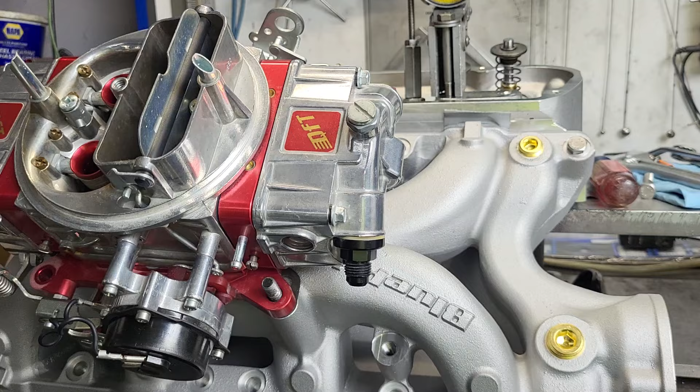Okay, guys, we got a treat for you today. We're going to flow the GT40X. Pretty much done. I think that's the way they're going to be. This is actually the other head. It is cylinder number 4. And we're going to test 2 intakes on it. This is the blueprint Edelbrock RPM Air Gap copy. On top, we've got a 650 QFT annular discharge carb. Really nice looking piece. And let's get to it.

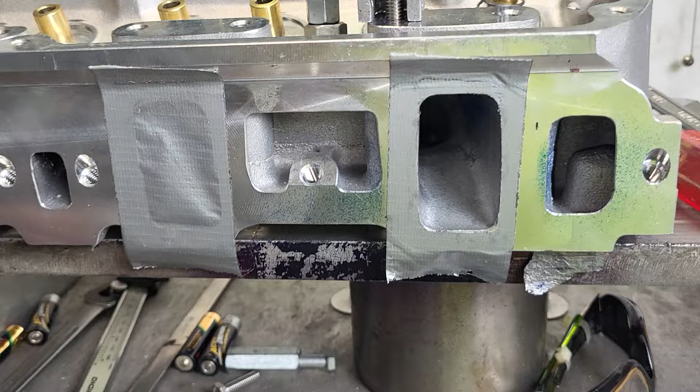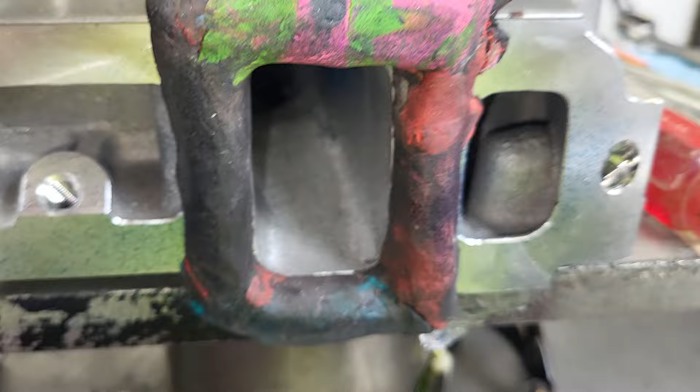Okay, an important point to make whenever I test manifolds: everything else is taped off except the port we're going to use. And all the other ports on the other side of the intake manifold have to be sealed as well, so you're only drawing through one port. Now, I'm just putting this back together because I want to give it a shot of Dykem in its finalized state. But we had a question on what the flow ball is doing, okay?

What the flow ball is doing is, if we're flowing and it's already past separation point on your short side, and you put a flow ball on the floor, such as something like this, that causes turbulence, and sometimes it can reattach to the short side, and you can see what your flow could be if you could stick to the short side. So I'm going to do a 2-second demo on this before we look at those intakes flowing through this port.

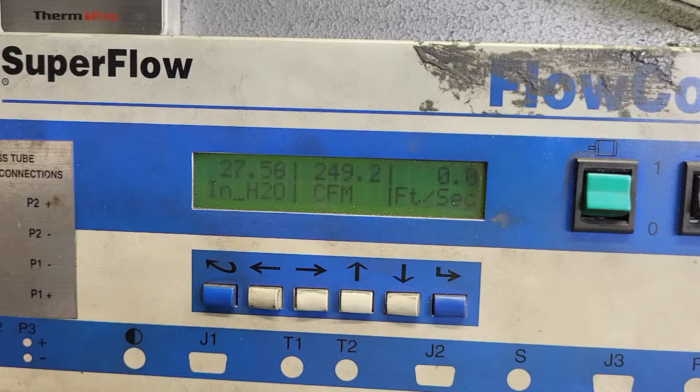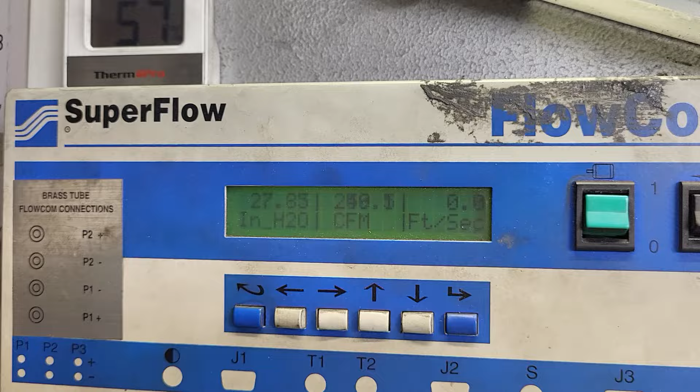Okay, you can see we can get quite a big jump if we can get the air to stick to that short side a little bit more. Now, there's a couple things about the short side I'm not thrilled with. One, it's very low. Two, the speeds are not bad where they are. Could I make them better? If I'd like to push the casting, I probably could. This is a street ride. I don't want to make anything thin. Could I probably do better than it is right now?

Well, right now we're at 0.6-inch lift, which is probably more than this engine's going to run on a street engine. And if I do any more work to the short side, i.e. lay it back, make it wider, things like that, or change the angle of the roof, the floor, I'll probably lose mid-range at this point. So we'll take a quick look at that.

If I remember, I have the flow numbers of the GT40X that DV tested on the 306 when I did my E7s, and we can compare them. I know he knocked the short side way back. I even have a picture of the chamber after it burned. Kind of interesting. If I forget about it, I'll have to make another video because it's good stuff.

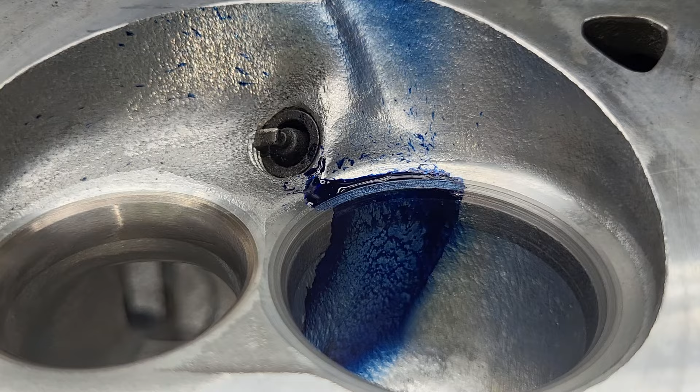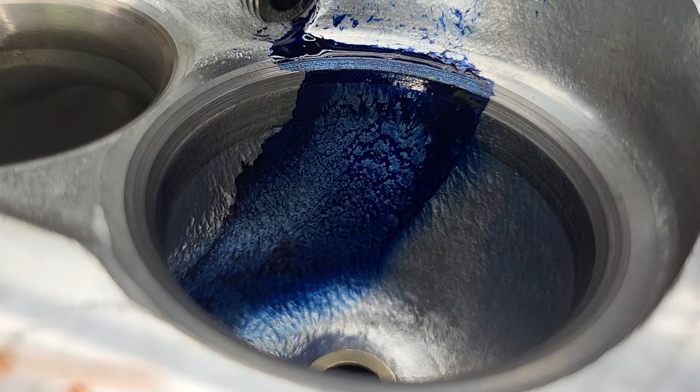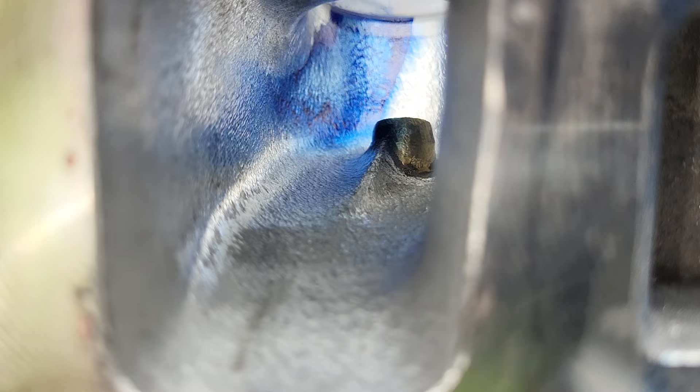Okay, now this has pretty much been finalized, meaning I went through all of them and I made all the bowls and so forth as close to the same size as I possibly can. You can see by the blue, we've got nice blue action on the chamber. We got a couple speckles on the other side of the plug. We look real good in the bowl. You got a nice powder on the valve. See just a hair on the other side of the valve. You can see how far back in the port the blue starts hitting that wall because the port is turned to the right. Okay, small block Ford, that's the way it does it.

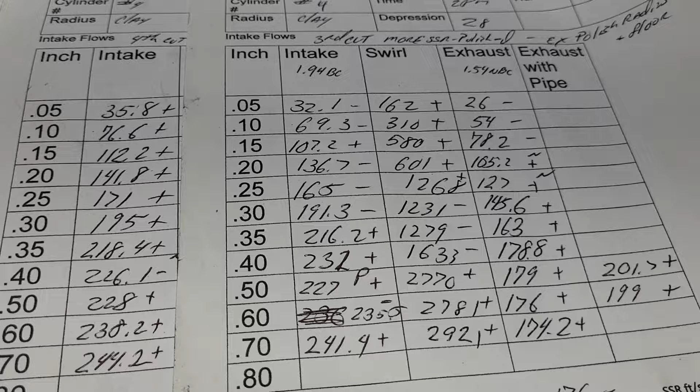Okay, we'll take a look at the third cut on the same port, number 4, versus the fourth cut. The other flows, I put it as 1. I do mix up my Ford and my Chevy firing orders sometimes. This was my original port that I did my development on. So I'm going to finish it up on that port and do all the testing on the intake on that port. So that's going to be our fourth cut.

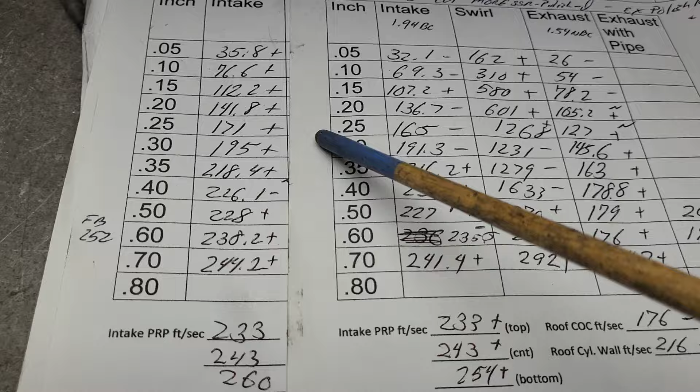How did we do? Well, by the time I equalized all the bowls and everything, we got pluses everywhere, but she starts the transition a little bit earlier. Now, that didn't bother me too much because I know we're going to choke it down with a dual plane and a smaller carb. Now, if you think that's a mistake, you correct me in the comments, and maybe we can learn something from it.

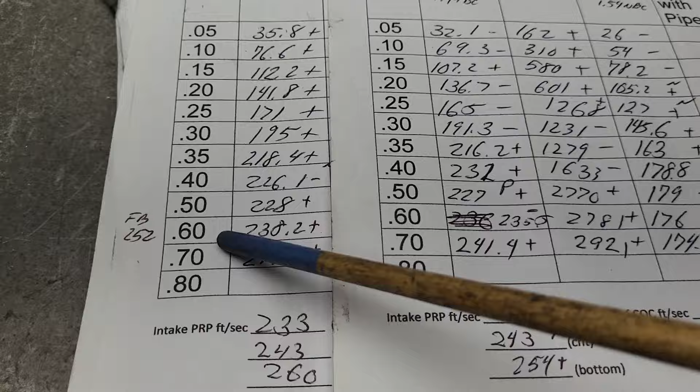Let me see if I can find the flows to DV's. I'll put them in here. Now, as it is right now, at 0.6, which is higher than this will go, we go 238, which is a little bit better than it did last time, right? Notice here at 5, we had a pulsation. Pulsation's bad. Okay, we didn't have that here.

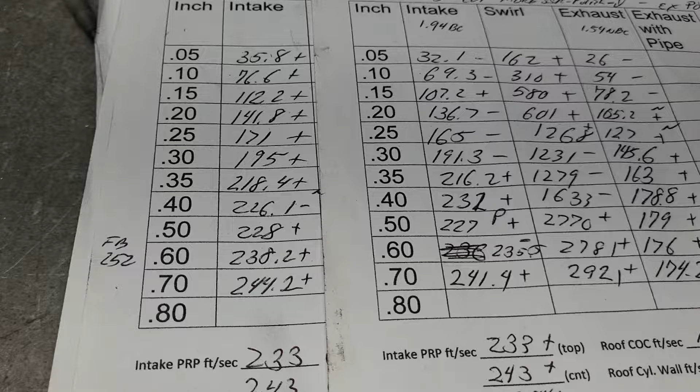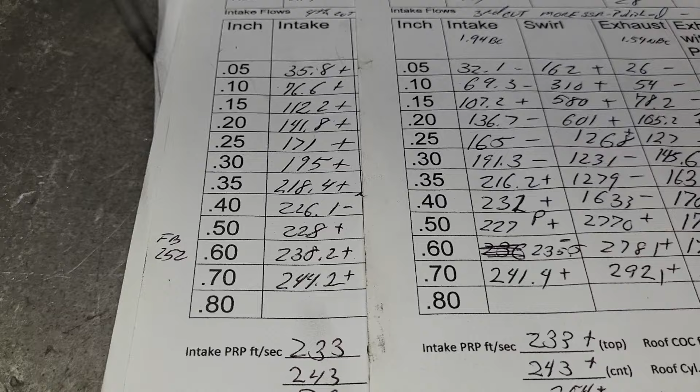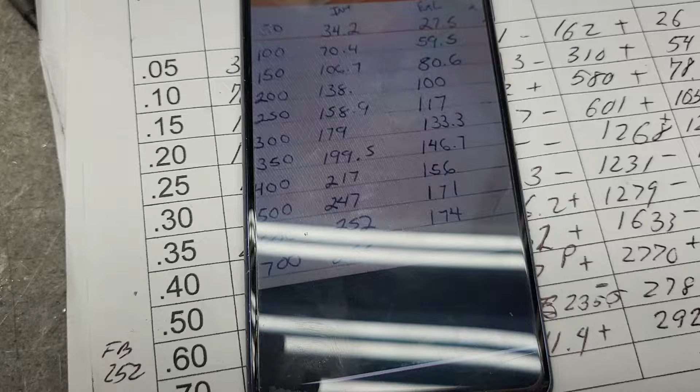And we put a flow ball on here, and we got 252 approximately. I think it did better than that on the bench when we did the demo. I think it went 255. In any case, not bad. Let me see if I can find those flow numbers from DV. Okay, that may be hard to see with the reflection of the lights, but that's a picture that DV posted. Actually, I think maybe Andy posted it on Speed Talk. They did a thread on these heads, and that was their last flows.

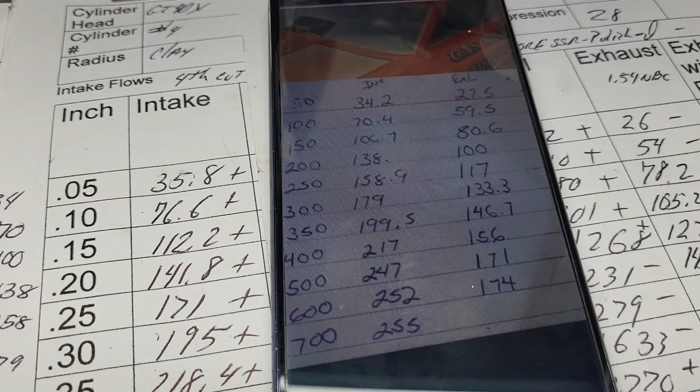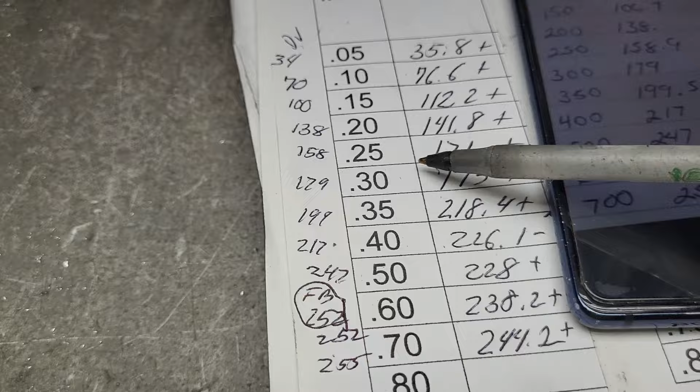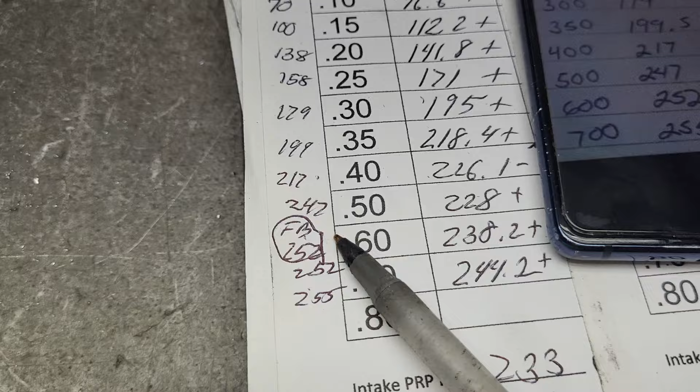I'm going to take those numbers and convert them. Okay, hopefully you guys can see it. This is how they convert. All right, these are DV's. Let me just write DV here. Okay. I got him beat all the way to here. See, I know he knocked that short side way back at this point, and he's got smoother flows. Where I break into transition, he's got smoother flows. But what happens is he dropped a lot here. I mean, we've got big differences between these three. I'm not sure which one would make better power, especially on a street application.

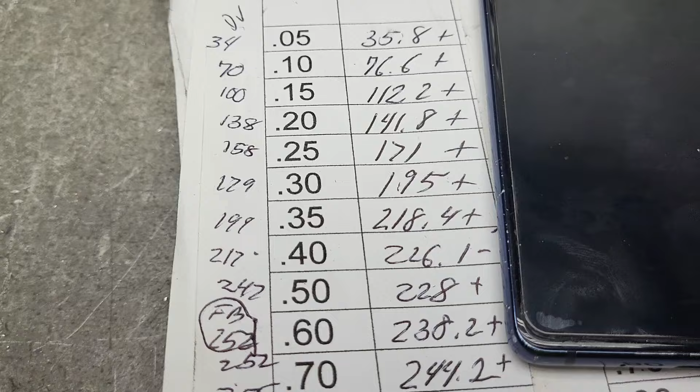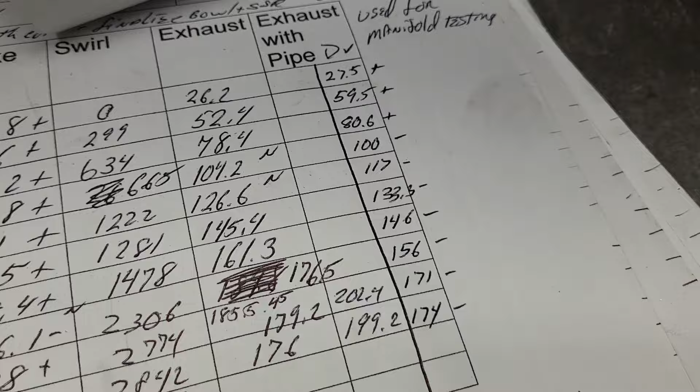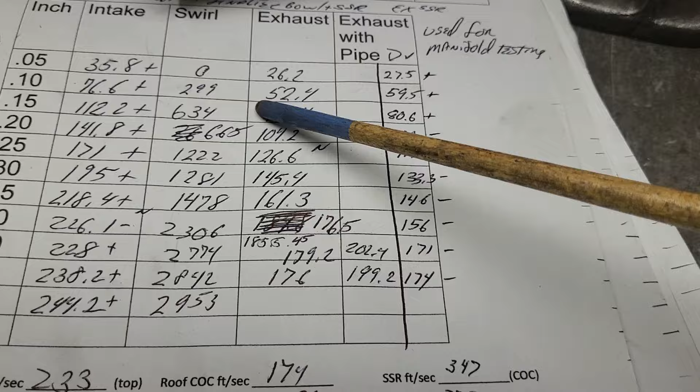Let's do the same with the exhaust port, see how we did. Okay, let's take a quick look at that. I converted it to the DV column there. Let's see how we did against that. Okay, it really doesn't surprise me because I'm using a stock valve job. DV, I know, does a custom valve job, so he likes his low lift flow. Yep, he beat me on all the low lift flows. And after that, I start winning.

Now, I have a little noise here. I don't know whether he has noise or not, but I've got some good gains on him in the mid to upper ranges, okay? And we top out pretty good, 180. I'm trying not to make that exhaust port too big. So that's what we've got.

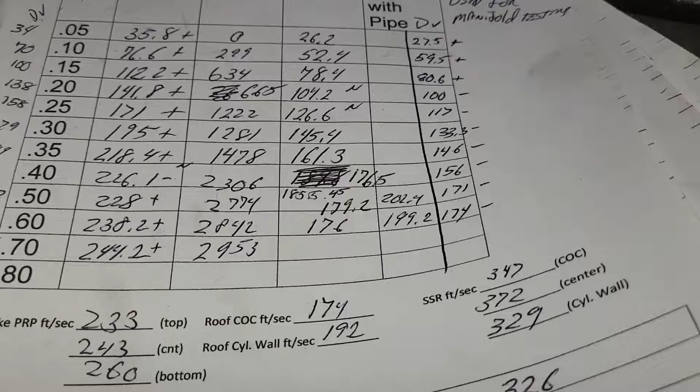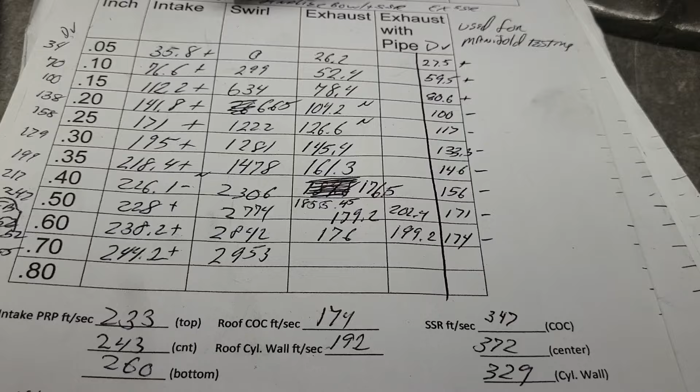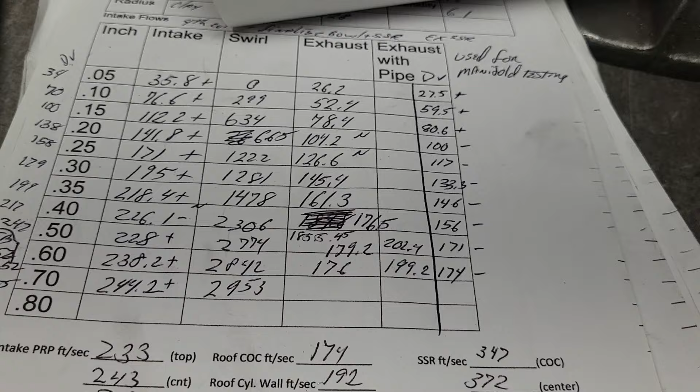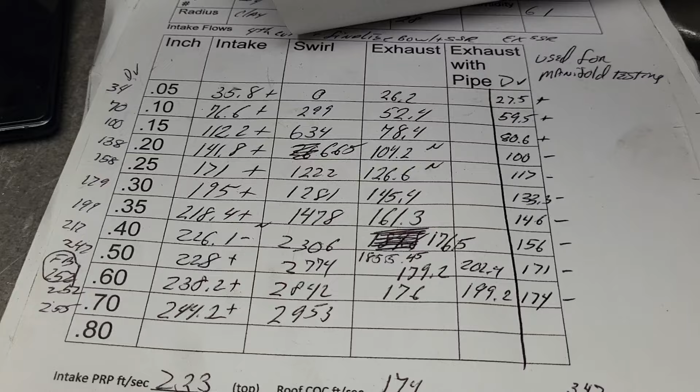In any case, with these flows DV made, now I know my E7s went 361 horsepower. That's on a 306 with a hydraulic flat tappet cam. It's only 206 duration at 50, 0.478 lift. And these heads were down a few horsepower, but they actually made more low-end torque. I don't know if I have those sheets on my other phone that I can show you guys. Okay, I can see this video is going to be running along already.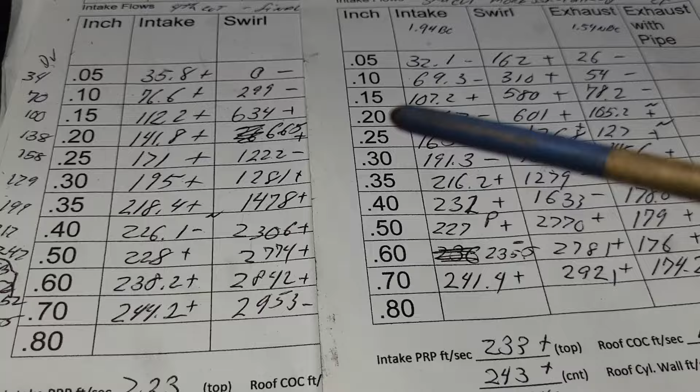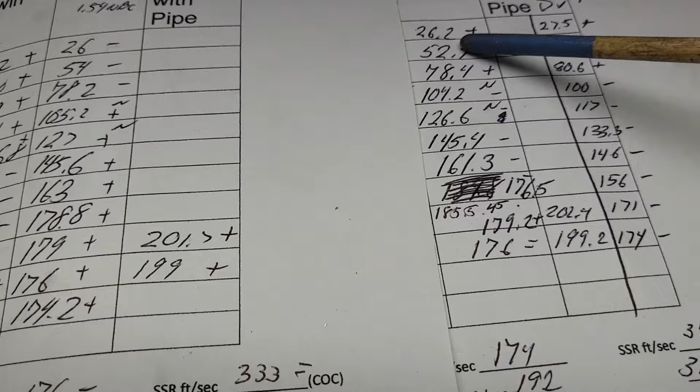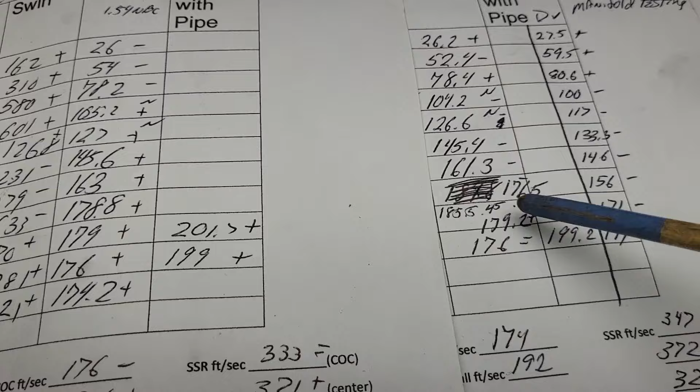Take a quick look at the finalized swirl versus third cut swirl. We got minus, minus, plus, plus, minus, plus, plus, plus, minus. It's fine. Either way is fine. Okay, as far as the exhaust, the only difference was I did polish the short side in a little more detail. And these are all hit and miss, a few CFM. This one topped out at 185 at 0.45. Okay, and we did a tiny bit better on our exhaust with the pipe. Still 180, 202. Not bad for a relatively small exhaust port.

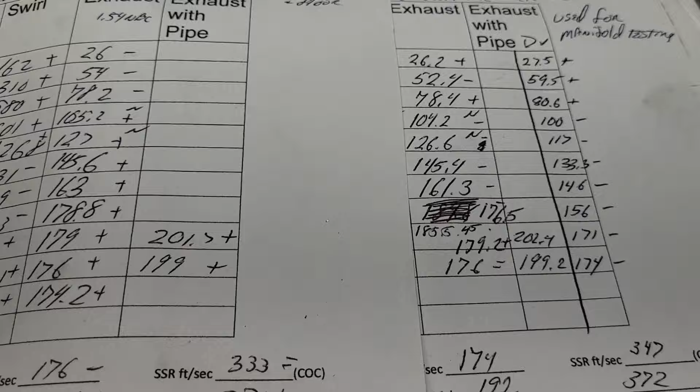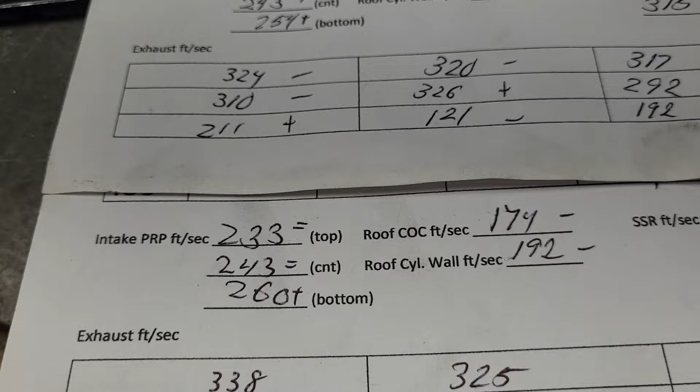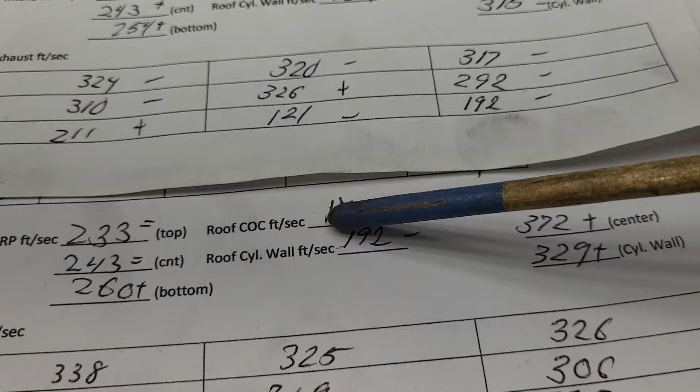Okay, take a look at third cut intake airspeeds versus fourth cut intake airspeeds. Now remember, all I did is equalize the bowls, make sure the roofs were the same size, things like that. Equals, tiny bit plus, minus, minus, very close though from what they were. I did raise one roof more to even this number up. Okay, see if you can figure out what I did there. And as far as our short side, we got plus, plus, plus, right? The short side is more efficient at this point, but it's starting to get a little on the fast side. Now, that's all tested at 0.6 inch. It's already in transition.

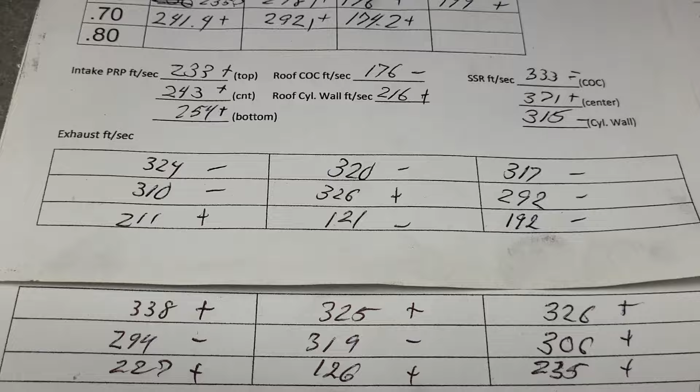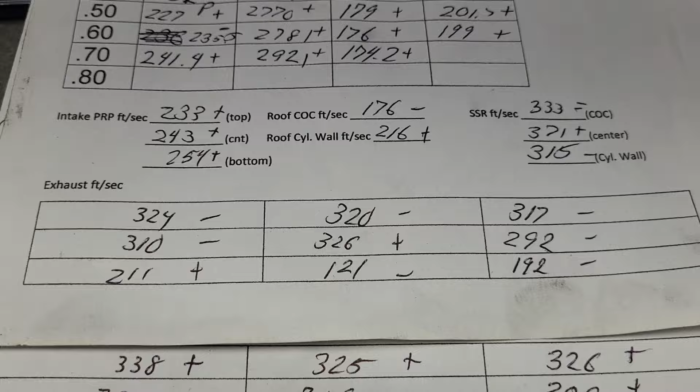Okay, and at the exhaust, that's our third cut exhaust air speeds, fourth cut exhaust air speeds: plus, plus, plus, minus, minus, plus, plus, plus, plus. They look better, but yet they flow almost identical. This has got a little more attention to the short side radius polish.

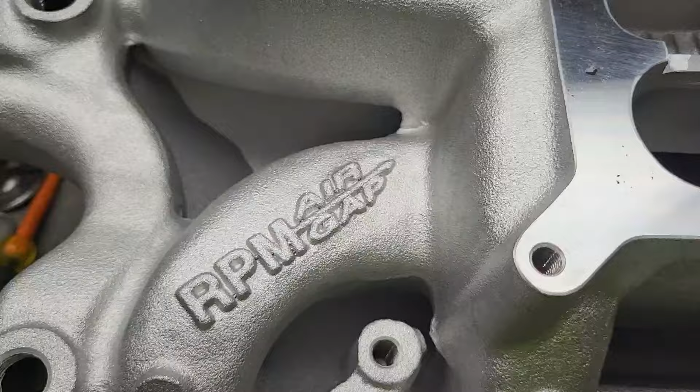Okay, brand new out of the box, Edelbrock RPM Air-Gap. That little tag means a lot to me. Now, what we're going to do is take a look at this, and we're going to look at the blueprint copy and see if, I hate to say it this way, that little tag is worth the higher price of the Edelbrock. I always liked Edelbrock stuff. I can't say I didn't. And the casting is in nice shape.

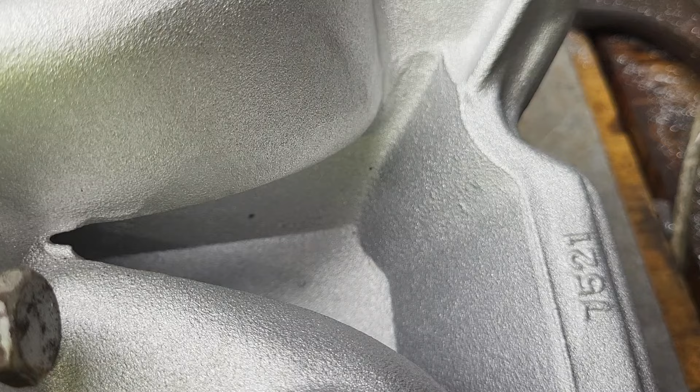It's a 7521. Okay, it's a high rise. It's got nice shaped runners. Okay, the plenum is nice. It's notched, but it's not notched very much. It's only about 1/4 of an inch notched. It's got the nice ribs in the plenum. Okay, the plenum does kick out. It should kick out.

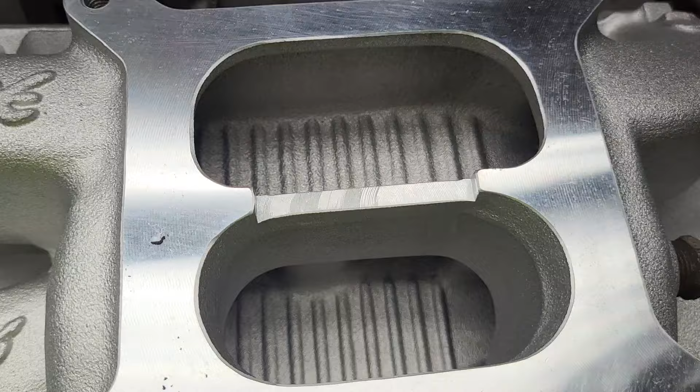And I will say that your transition on the bottom plenum to go into the runner is a little small. I probably would have made them a little bigger. But as I always say, they probably did that on purpose because the bottom plenum usually flows better than the top plenum.

So when we did testing on this, we used cylinder head number 4. So our first test is going to be out of this runner, which is an upper H, which we would expect to be a little bit lower when I flip the intake manifold and flow it through this one at the lower. Okay, so that is number 5. So we're going to compare 4 to 5. Overall, nice looking piece. Let's take a look at the bottom. Okay, I got a one-handed.

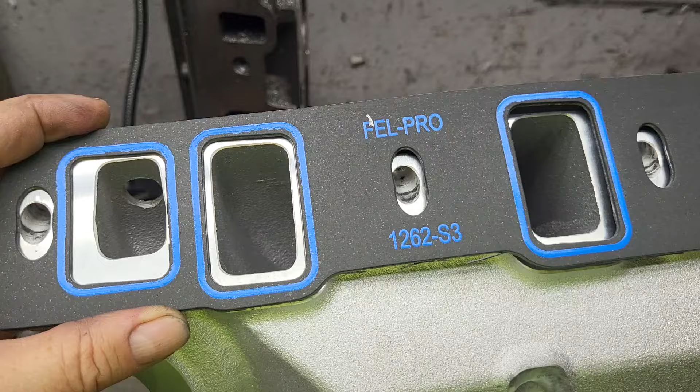Now this gasket, 1262S3, fits the cylinder heads almost perfect. I didn't change the opening on the cylinder heads. So the cylinder heads are about that big, and the intake manifold's quite a bit smaller. Now, is that a detriment? Depends who you talk to, right? That gives you a nice anti-reversion edge. May not be a bad thing on a street engine.

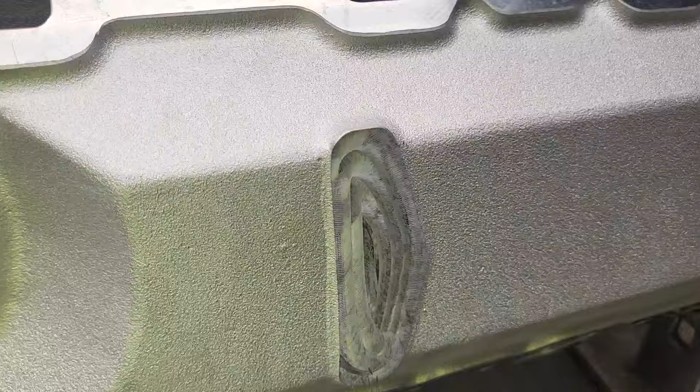Now, can we take this and open it up and get some more flow? Well, you might, and you might not do anything. The customer has to decide if it's worth spending the money, or are we already there for what he wants to accomplish. Okay, we measured the openings. They are almost identical to the thousandth between the Blueprint and the Edelbrock. The Edelbrock's got a little bit different finish on the bottom, but it looks like it's all machined very nicely.

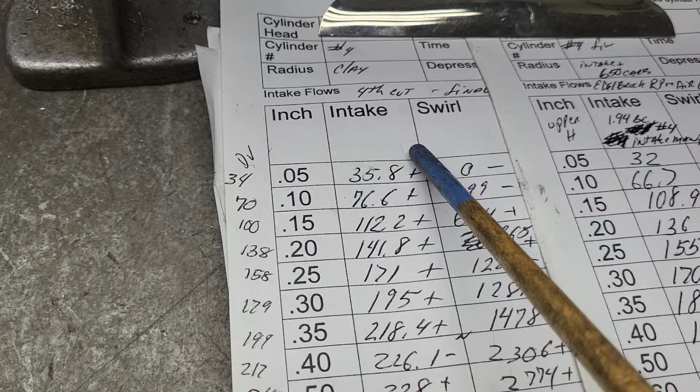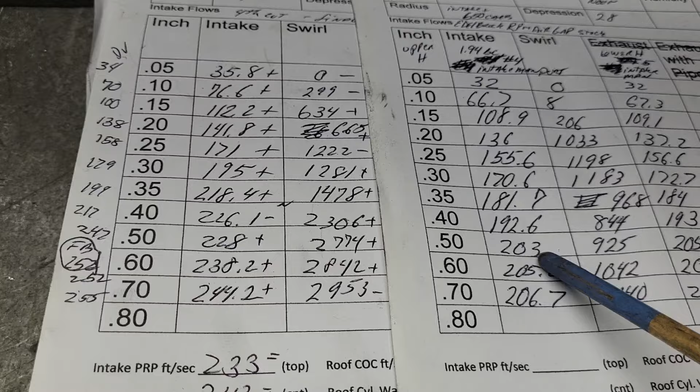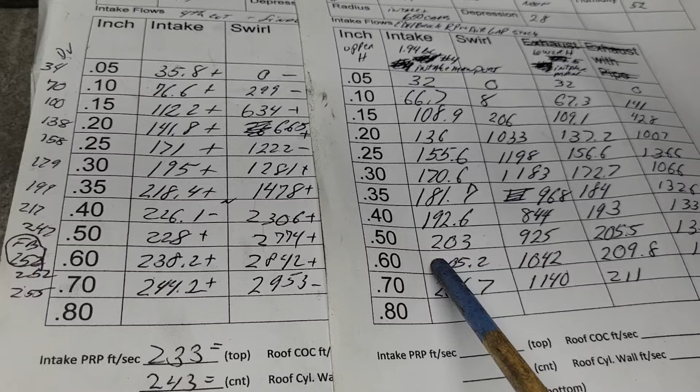Okay, I got some scribbles on here so you can see. Number 4, which is this runner, upper H, right? I wrote up here, upper H. And it's going against our 4th cut number. So this is what you're going to get. Obviously, you're going to lose because it's on an intake manifold. Like I said, most dual planes only flow about 220. Now, you're putting it also through a carb and a cylinder head. So if we're running right in this area, we have over 200 CFM flow. Should be more than 400 horsepower right there, okay? That is with a completely untouched Edelbrock and a 650 annular discharge carb.

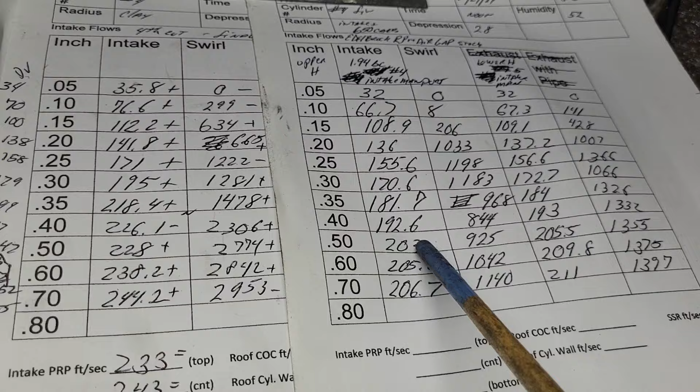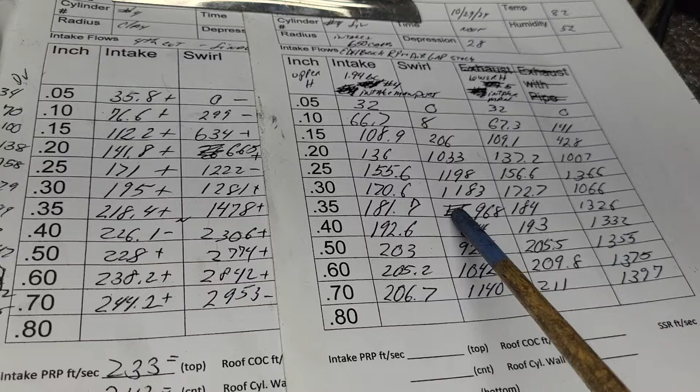Okay, this is what happens to our swirl. This is where we were. This is what it is. Notice how much it changes. It's actually a bit low. Now, this head is designed for adding swirl. I wasn't able to test this head completely stock with the intake manifold. Intake manifolds just came in. But it's kind of interesting, right? We don't have to worry about too much swirl at this point. We're actually a hair lower than I'd like, but I think it'll work fine.

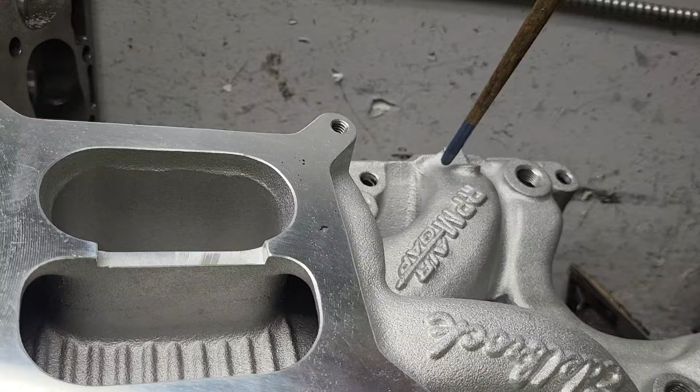Now, let's take the intake and just turn it around. Okay, so now we're going to be in the deeper plenum. This plenum does have some anomalies in it. It has got a big ridge here. It's got a ridge all around it. The Blueprint does not have that. Okay, so we're coming down and we're flowing through this runner. Now, remember what I said about the deeper plenum, right? I usually found that it flows a little bit better.

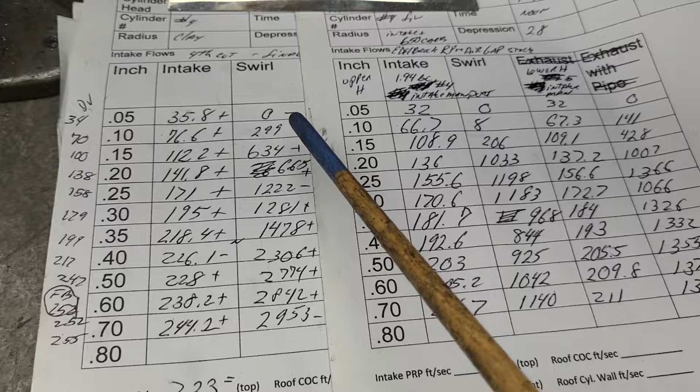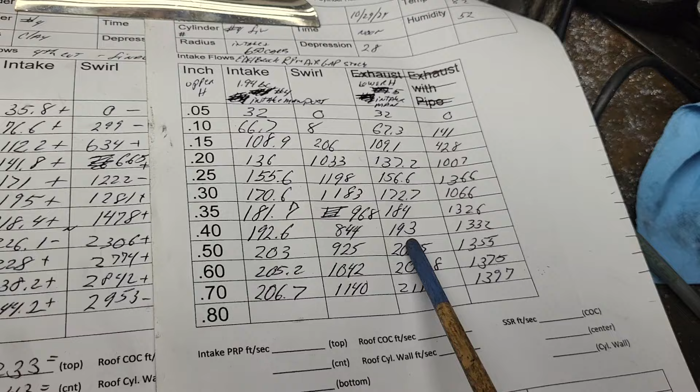Let's see. I think we're going to leave this set up like this so you can see what the cylinder head did, what the upper H did, and this is the lower H. The lower H, overall they did a great job keeping it almost equal, but you can see the taller plenum makes a little bit of a difference at the top end. It's also got a little bit better swirl curve. It's a different port. It comes in at a different angle, right? This is a low entrance into the port, whereas this one is a relatively high entrance into the port. It does make a difference.

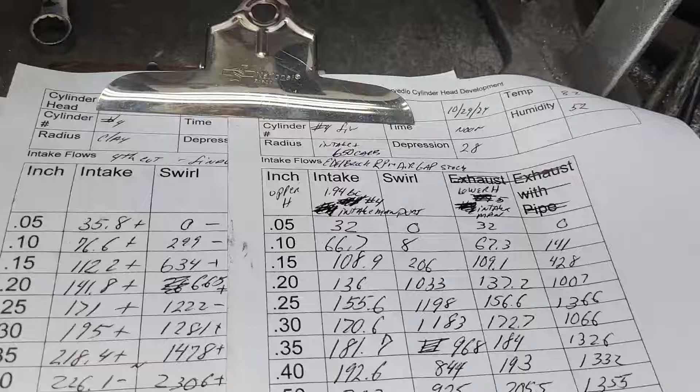Overall, the guys that designed this did a pretty good job, okay? That's probably the most even I've seen upper H to lower H. So good job on that. All right, before we take the Edelbrock off the bench, let's just take a couple looks and see what we can see. All right, it's a nice looking piece. It's got nice curves.

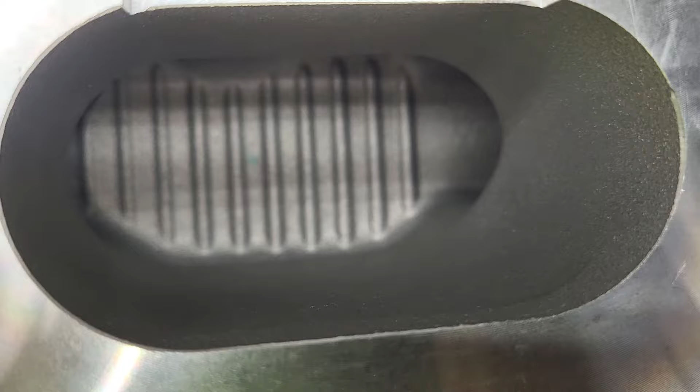Let's see how the Blueprint did. Okay, the Blueprint, we measured a bunch of stuff. It's almost identical everywhere. The upper plenum doesn't have that ridge that the Edelbrock had. And as soon as I looked at it, I thought, due to that ridge, the Edelbrock will lose a couple CFM, maybe 3 CFM. See if I was right. Good looking piece. The machining looks really nice on it. The notch is almost identical. It wouldn't surprise me if they both were manufactured in the same place. They just have a little bit different finish to them.

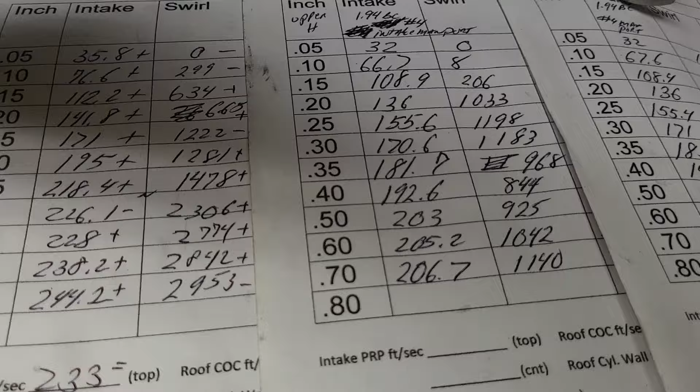How we're going to do this, I think we're going to leave all 3 sheets up. You can see what the cylinder head did, what the upper H did on the Edelbrock, and this is the upper H on our Blueprint. How did we do?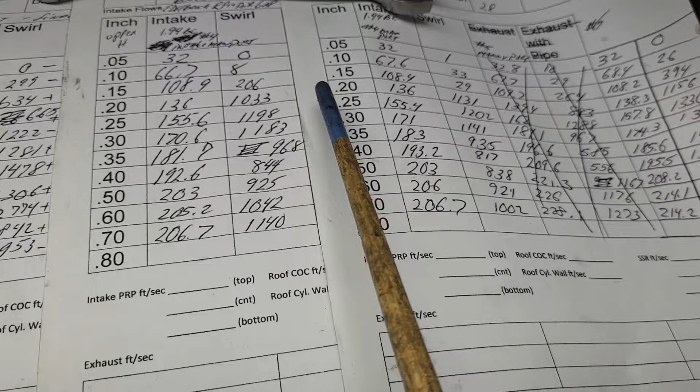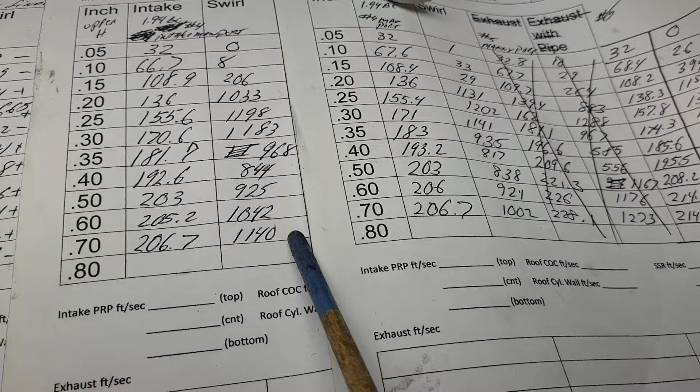Can't really get closer than that, guys. Really can't. Even the swirl progression is very close. Okay? Extremely close.

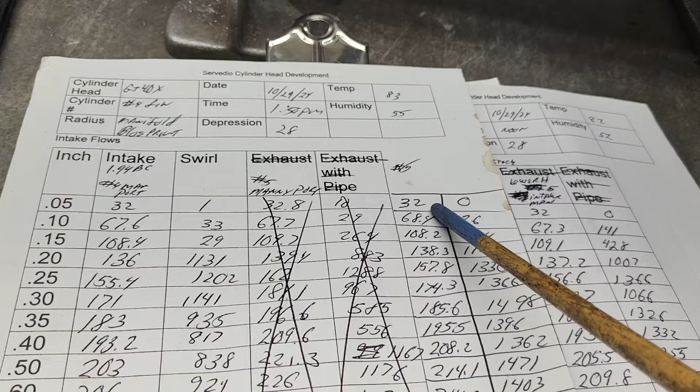Okay, these I put X's through them. I put it on, I did a flow test, and I forgot to tape the other runners. So you can get an idea of how much things go up if you don't seal them off. Notice we go up to 228 here, which is considerably better than this port did when it was all taped up. Okay, so this is number 5, which is the lower runner, and we can compare it to the Edelbrock.

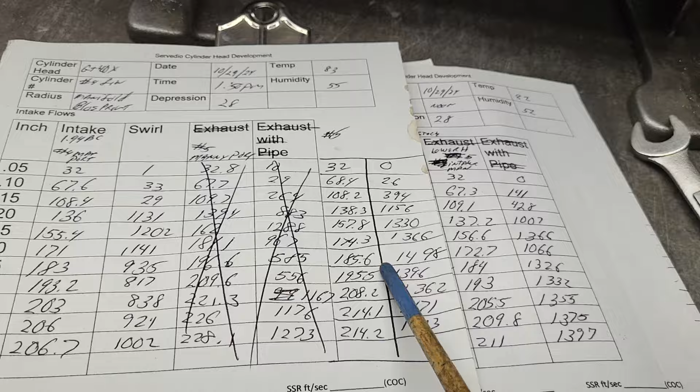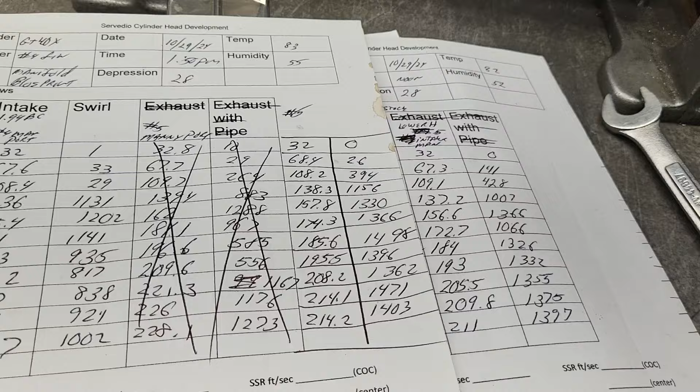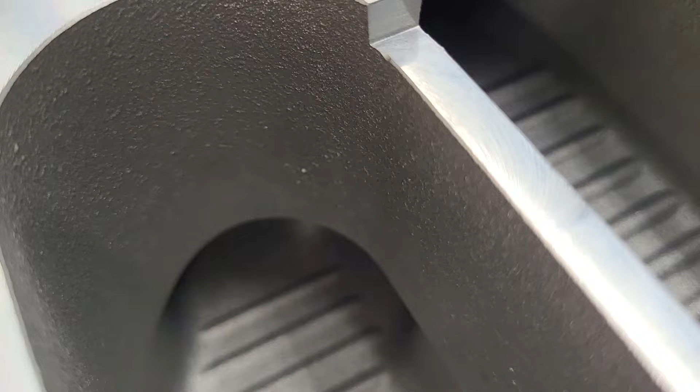Let's take a good look at this Blueprint, and we're going to take a look at them right next to each other, and then I'm going to sign this video off. Okay, nice inside the plenum. Very much almost identical curves. Right? You can tell by the way it performs, it's almost identical. Okay, the machining finish is really nice. The bottom's a little bit different. Okay.

Does it have a number on it? It's got a number on it. Let's see if you guys can see that. Revision A.

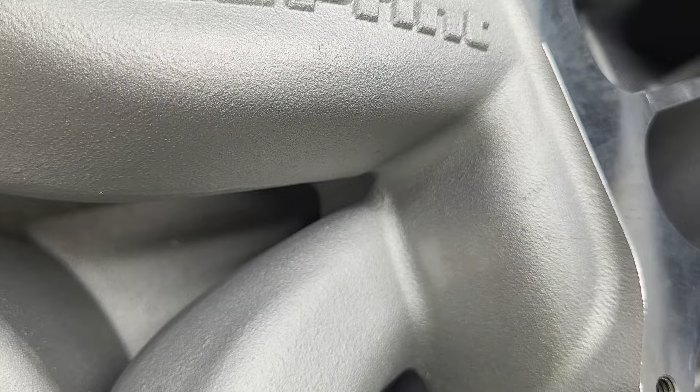Okay, right next to each other. Now, the Edelbrock is a little bit shinier finish. It's a little bit rougher finish. Then the Blueprint, a little duller finish, a little bit finer as far as casting sand. Or is that my imagination? Now, I don't know if Edelbrock coats these with something. They may coat them with something to keep it shiny. I don't know.

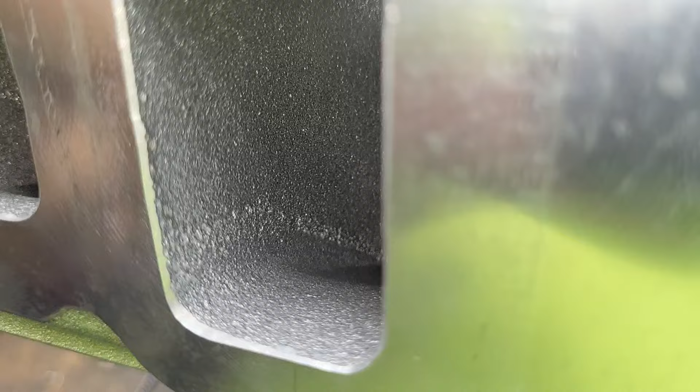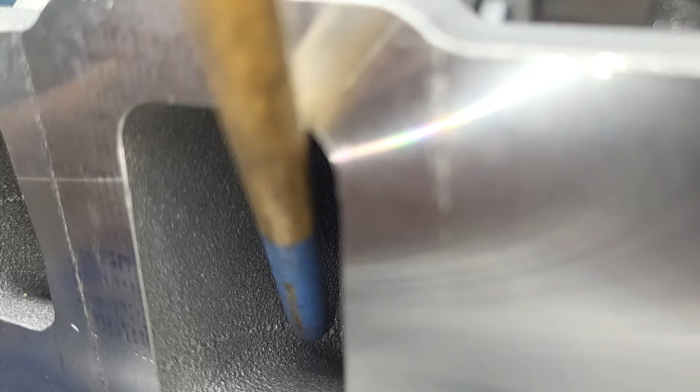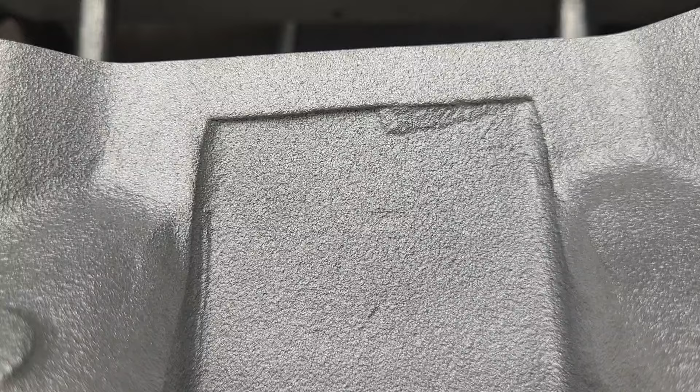Now, like I said, I don't know who. I mean, look at the plenum on the side, right? The way it's notched out there, and the way it's notched out there. To me, they're so close. They may come from the same place. I don't know. I'm sure somebody knows.

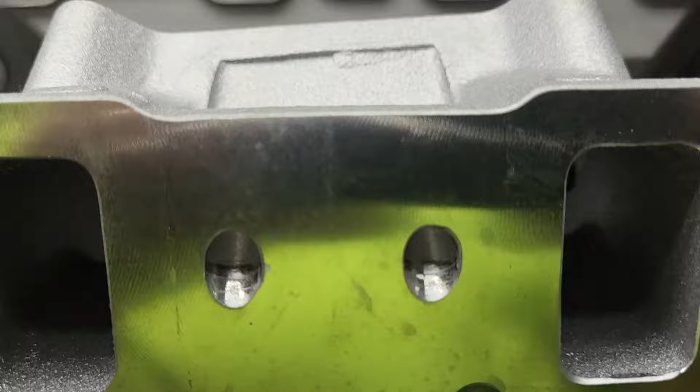Now, the big question is, is it worth it for the customer to spend some money and have me work over whichever one of these he wants me to work over? Or better off running them the way they are? You got 400 plus streetable horsepower right now without me doing anything else to the heads and bolting on a completely stock intake manifold.

The project, as it sits now, he doesn't know how many cubes he's going. It's between 306 to a 363. He's kind of looking at 347 crate engines right now by a lower end. And he's undecided about that. It's going to have a 5-speed. He's got the 8.8. I saw it in the truck last night.

He's thinking of going with a 355 gear because if he goes steeper than that, he does have experience with Fox bodies. He knows 373, 411, first gear becomes kind of useless. It does nothing but cook the tires. That becomes different if you're going to slicks and you're drag racing, but this is going to be a strictly warm street application. So I'm looking forward to what you guys have to say about this, and if we need to do any more work to the head, or we're going to let it cook the way it is.